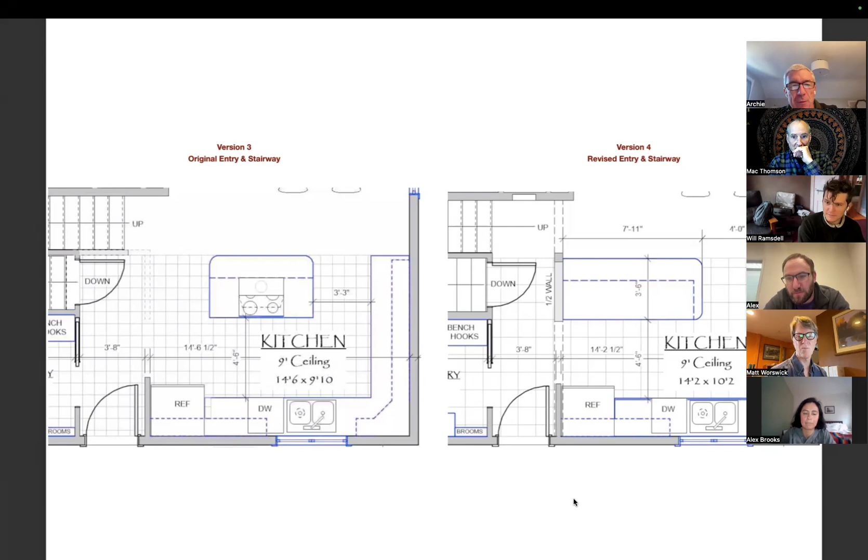Okay, I'm going to talk about the stove for a minute. You're going to see the stove in two possible locations: the island on the left, and what I'll just call the exterior wall, since whether it's north or south will depend on where this house is located, what side of the street.

We've found out a few things since we last talked to you, a lot of it has to do with ventilation. Engineers, and Claire too, have had some pretty good insight into this. It's not just smell, it's heat, so you really want to ventilate to the outside. Our engineers have suggested it would be best to do that against that wall.

It also gives us more efficiency because we have the ability to put a microwave above it. I'll show pictures of this in a minute. It would likely be a little cheaper doing it there because of where you have to run the wires. You're going to have to add a hood from the ceiling, I'll show you a picture of that too.

So you'll see the stove on that side, and it looks like that was going to work better overall. The final thing was for efficiency of the kitchen, this came out of the Juniper, to be honest. It works very well in that location.

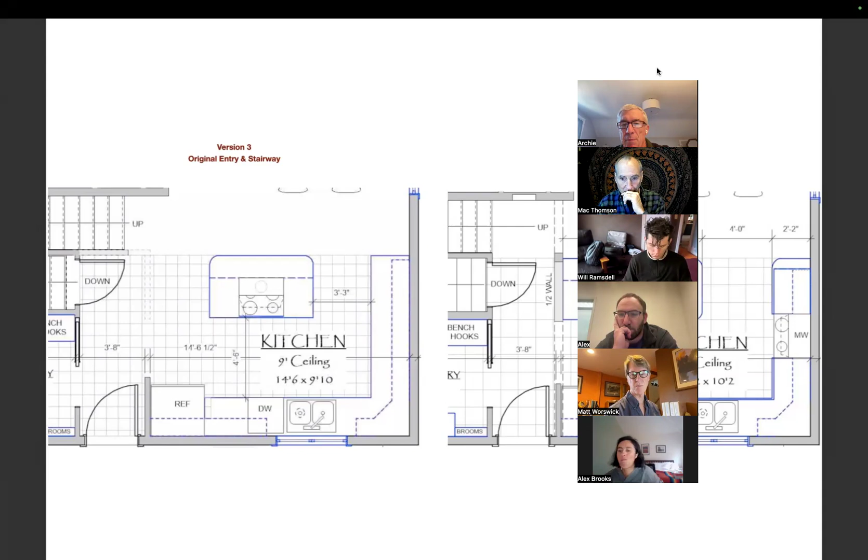I'm going to jump to this because I want you to see the pictures. The island one, we were pretty much forced to do this. That adds cost, and it also affects the view, which I'll show in a minute.

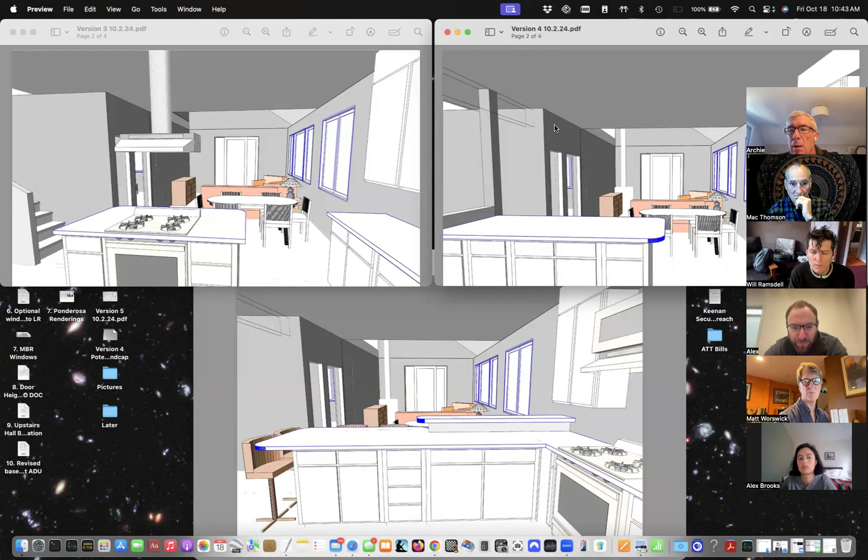And you've got two there. I'm going to go to what Matt has asked, these are all done by Matt, so they're different versions, and we'll talk about island versus U-shaped or whatever as we go along. What I really wanted to show here is the stove at this location, you're going to have to do the hood, and here it's kind of incorporated in. And you saw the pictures, this is not probably how we would do microwaves as far as that goes.

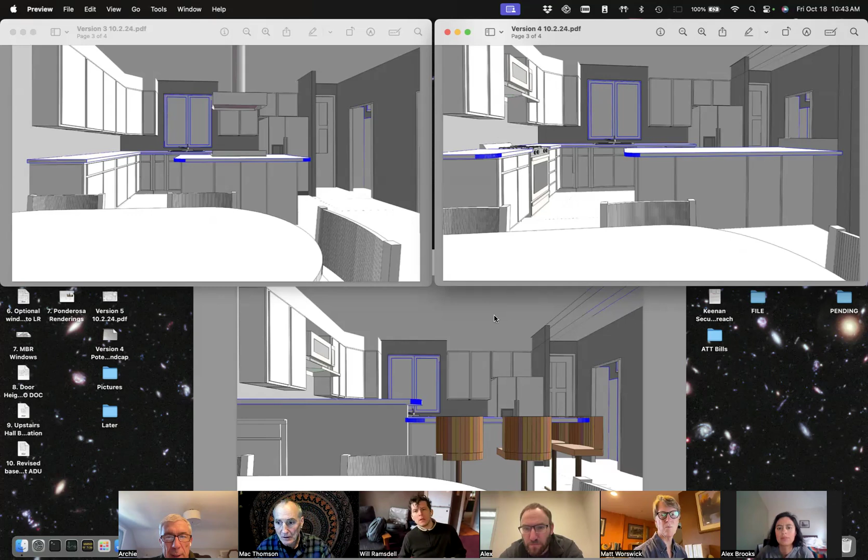I'm going to quickly give a view again, so now you get a view of here, here. One nice thing about this is if the stove or oven is open, it's very easy for people to stand on both sides, extract what they want to extract, and be safe at the same time. It could be moved to the right on this one, which we'll cover in a minute, it's just not quite as much room.

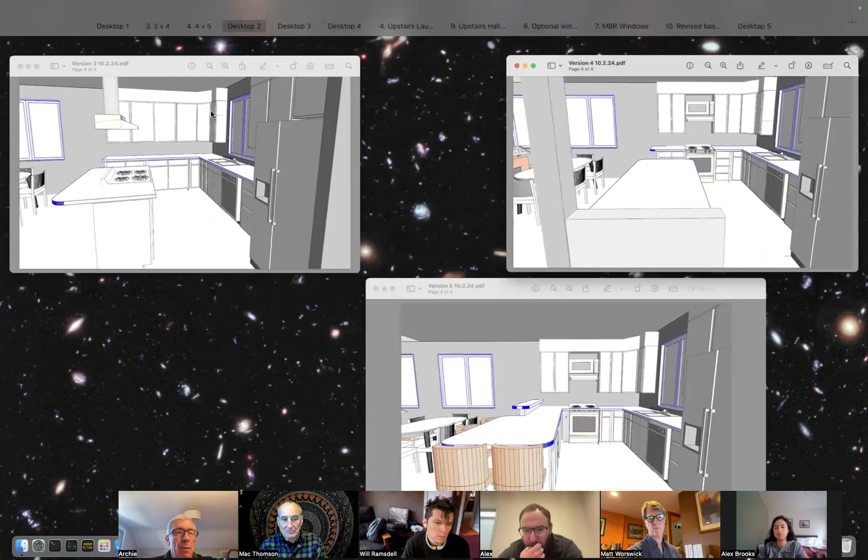So now we're going to go backwards. Does anybody have any questions on the revised entryway? Alex, Archie, Alexia, anything?

Archie: just one comment, the wall on the right, regardless of whether your house is on the east side of the pathway or the west side, that will always be the south wall. Oh, yeah, that's right, because they're mirror images. Yeah, my mistake. East and west changes, but north and south stay the same.

One quick question, which I think I know the answer to: on design four, we're not planning to wall off the ADU, but if you were to wall it off, it looks like you would only have one entryway into the kitchen. Is that correct? That'd only be which version? Version four? Yeah.

Let me jump in, go ahead Matt. So originally, where Archie showed, it would probably be a solid wall, and you would have a single entrance in. That was version 3.

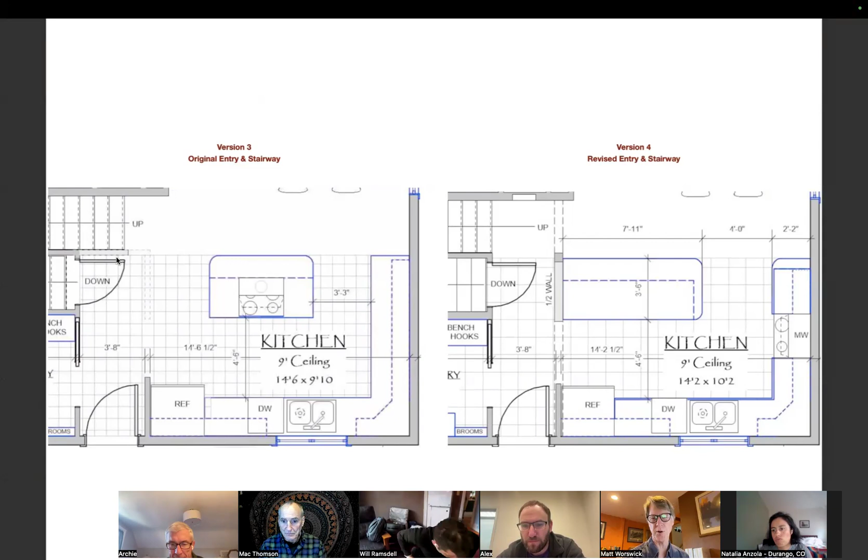In version 4, and we'll get to this in more detail, in terms of the sense of separation or amount of separation you have from the entry and the kitchen, version 4 is showing a half wall there, a column, which may or may not need to be there structurally.

In my mind, you could actually build right behind where the door is open 90 degrees. You could put in potentially a door there as well, across there. You're going to have some potential door conflict things, but if I was going to close that off, I would put in probably an interior French door with a glass panel in it.

You could potentially have screens in the glass so it would allow daylight but provide privacy, and it would swing back against where it's showing the half wall, which would become a solid wall. Then you could have another door, probably a pocket door if needed, between the kitchen and the entryway. The point is it's customizable, much tighter, but you could end up with a kind of enclosed hallway by putting in two doors in effect.

Does that make sense? It does. And again, we're not planning to do that now, but I was just curious because it looks like it does change the entryway. So I was curious what your thinking was.

Right, it is a trade-off, but as you can see, if the kitchen has a lot of extra space, which is very desirable, I wanted to provide for that, but still allow the opportunity to create some privacy if people needed it for the ADU.

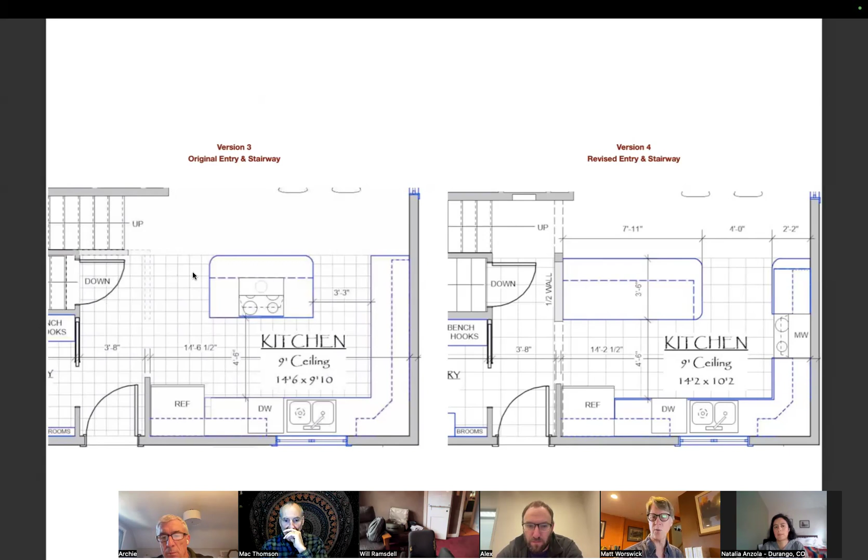You can see through, but in version 3 and some of the other versions, you just kind of walk into the kitchen, and you can also modify the shape of the bar. The half wall can go away, that kind of thing. There are other versions of the half wall that could also be a storage element, like a cabinet, as Claire brought up—there are some great ideas for additional storage.

But the sense of separation from the entry is one piece, and the sense of separation from the dining room into the kitchen is the other one.

We'll show with some of the visuals that Archie ran through—we've got a U-shaped kitchen with a half wall type element—how the sense of separation from the dining room into the kitchen, and the visual connection of what you can see on the counters, varies quite a bit. So I think Archie has some of that queued up and we can review those elements.

So do we want to do that before we get into 4 versus 5? I think we do. To me, that starts emphasizing those two elements. If you do 4 versus 5, we'll be able to cover both of those.

So you can see top right with the half wall or some kind of storage there in the column. Just from the entryway, there's that kind of sense of separation, and over your head you're going to have that with the beam and things too.

The lower center is the U-shaped version, but one of the main distinctions is the way the bar counter is handled, so that it wraps around. So you have bar stools on both the dining room side and the entrance side, addressing some commentary about being able to sit at 90 degrees and have crosstalk and things like that.

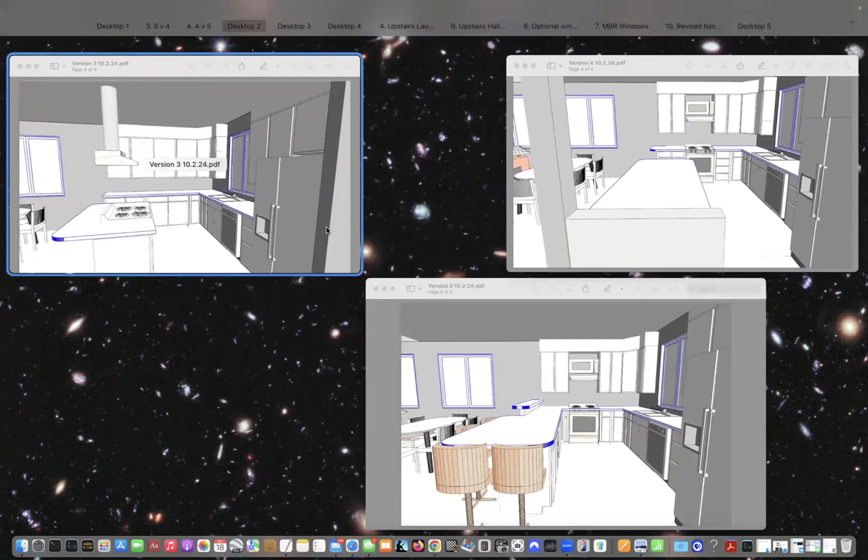So now you're seeing... we haven't got to this yet, so that's a great introduction. Thank you, version 4. This is version 4 versus version 5. What you've got is the redone entryway, and you've got an island versus the U. The U is kind of unique because it offers you the best of both worlds. I'll show you a picture in a minute where you've got a half cap wall, which hides part of the kitchen, yet you've also got the raised bar. So if people want to sit, or however we want to do it, if you want to put cabinets there, you can.

So Matt, do you want me to go to the pictures of it or the drawings? Yeah, I think for people to visualize. So I think in the floor plan here, you can see the basic traffic pattern.

Can I make one point on the floor plan? Those grids, folks, are a foot on the side. So if you want to use it for sizing, you can do it just by counting the feet. They're 1 foot grids.

So you could see there's the basic difference in terms of the double traffic pattern versus the single. In the U shape, the bar's pulled back in a little bit, so the entrance is a little bit larger, and we also have that wraparound seating area. So that's kind of the traffic pattern type elements.

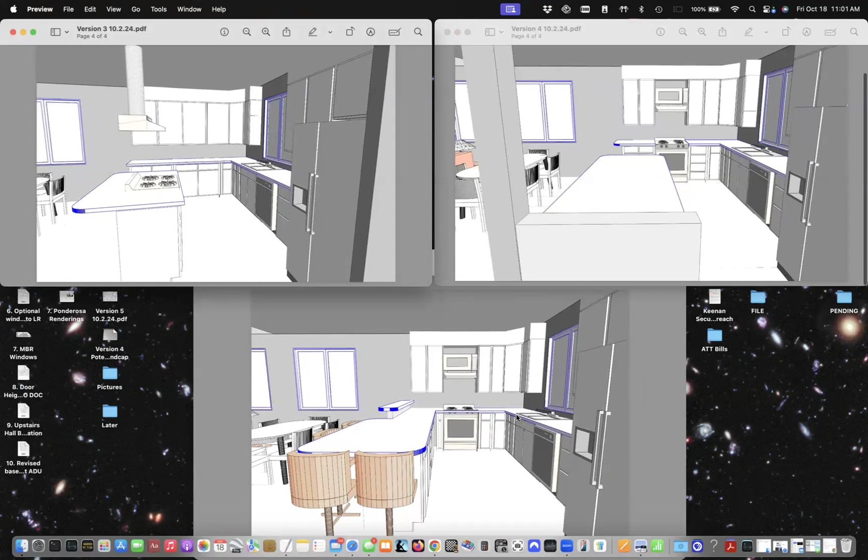I think one of the biggest pieces has to do with the visual connections. We talked about the entryway, and this was the picture we looked at earlier. Archie, do you have a comparison from the dining room?

I'm having enormous trouble, I'm going to have to do it this way, I'm sorry. Okay, so as you might imagine, in terms of sitting in the dining room... that's a good start. So if you're in the dining room, you can look in.

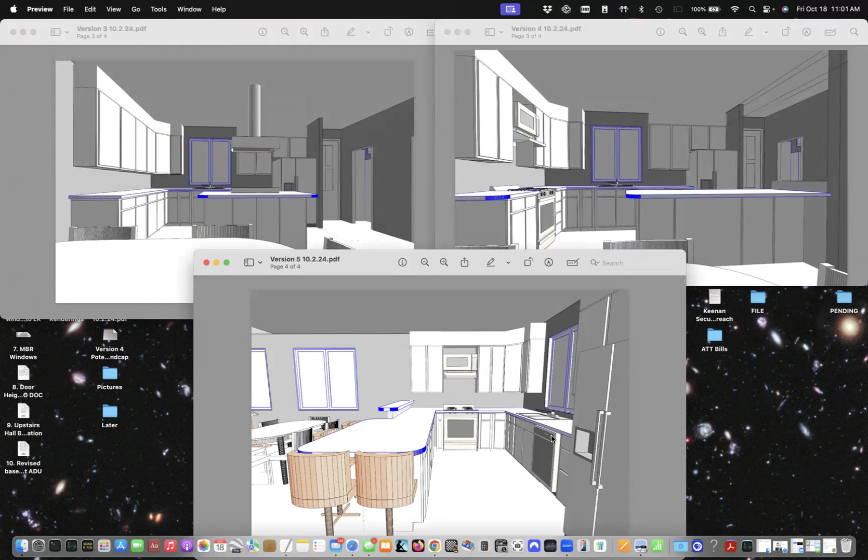In the upper right, I think, is the expanded version. So you can look in, you're looking at your stovetop, you're looking into that space.

You can imagine, and Claire might want to jump in here, but she did a great job with the juniper project basically talking about your lifestyle in terms of how you like to entertain. If you have people over, is it interactive? Are they helping to cook? Is it informal? Are you a fairly clean-type crew in terms of managing dishes and pots and all that kind of stuff, so your counters are relatively clear, or do you not care if people see that? Or do you like a little more separation, a little more formal, maybe you have things made, you want people to sit down.

Like the lower picture, you can see that half wall element really blocks the view of the cooking area all the way around the stove, etc. It also allows more separation if you have small appliances or other stuff sitting out on your countertop. So there's traffic pattern issues, but the view of top left, and well, actually all of these are good.

Top right and middle bottom are kind of the number 4 and number 5 versions in terms of the visual separation. So I'd really love to get some feedback on people's lifestyles, how they like to cook. I invite Claire to jump in if she has additional comments, and then get feedback on that sense of separation and what people's preferences are.

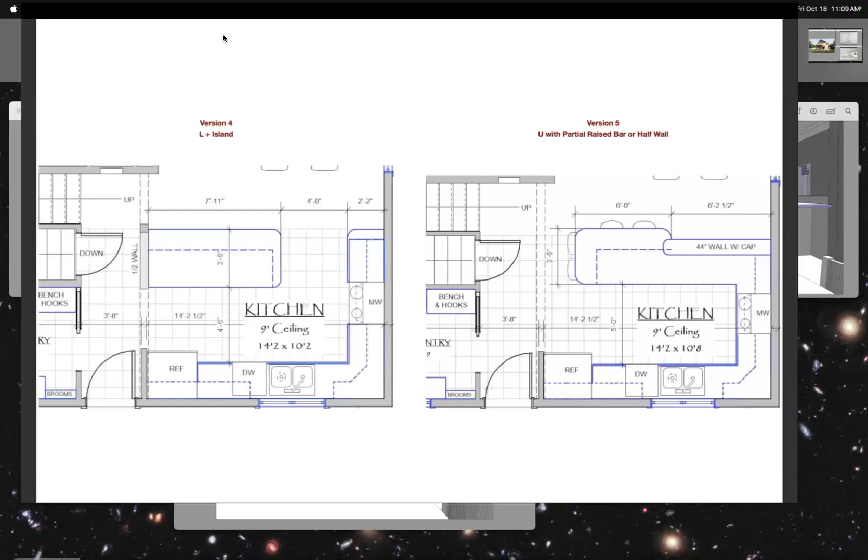I'm actually kind of wanting some sort of hybrid between 3 and 4, though. I like the openness of the view from the door in version 3, but having the stove over on the wall makes sense. So having the island a little bit bigger maybe than in 3, but having that openness in both directions seems nice to me - just to throw a wrench in everything and not agree with a single design.

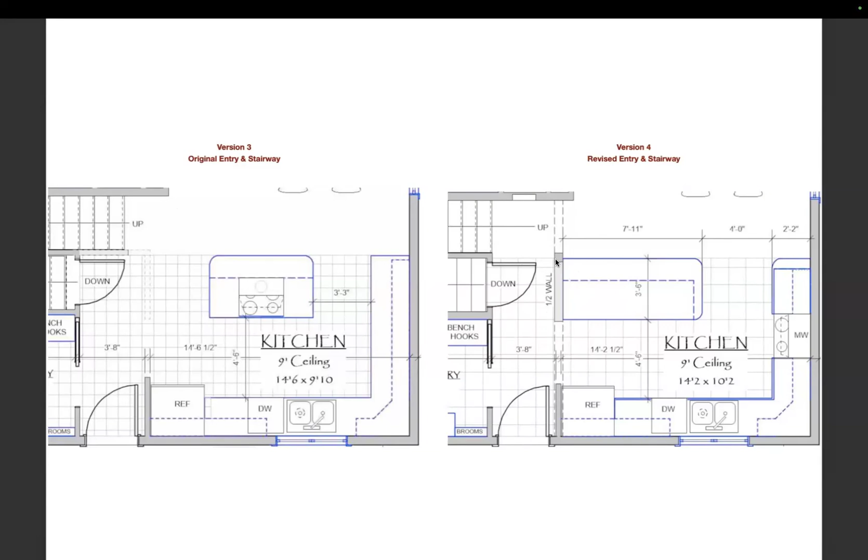Okay, hang on a second, because of what you just said. The one thing I'd point out - Matt, correct me if I'm wrong - but as it sits now, except for the post, it isn't all that different from what you see, because this corner hasn't changed. Right, that corner's absolutely... I mean, the front door area mostly hasn't changed. What changed was the stairs, and the post is in your field of vision. But other than that, you're pretty close. Right, absolutely, yeah, so I think it's mostly the post.

The variables in there are the post and beam and half wall elements, or taller cabinets, that would create a sense of separation at the entry. I think what I'm hearing is if you wanted to open that up more - if the post wasn't there, if the half wall wasn't there, and if they made a cabinet version tucked down under, so you could do a cabinet facing the entry but tucked under the bar - all of those elements tend to open it up more. So when you walk in, you don't have as much sense of separation from the entry into the kitchen.

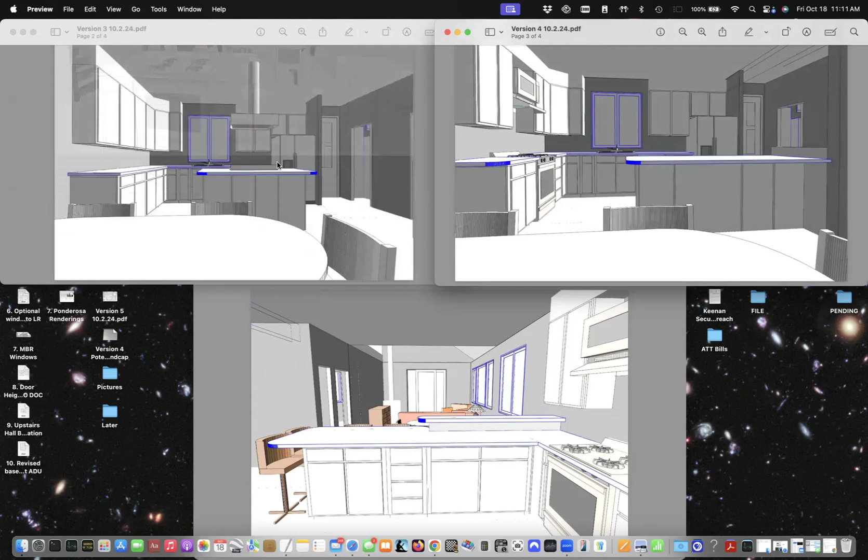That's some of the fine tuning that Archie talked about with the island. When the island doesn't have any appliances in it, it makes it a more flexible element. I think that's one of the nice things, and we'll have to get in with the SRT and our cabinet suppliers to see if people can customize those or whatever. But there's nothing really constraining us from having some adjustments to affect the feel and function of that island element.

That all makes sense to me. I'm gonna throw in something here - not something we need a decision on, but just to let everybody know. Claire comes from another co-housing community, and I hadn't even thought of this, but as long as the floor is continuous, you don't even have to put the island in. What happened there is a bunch of people ended up putting their own in after the fact, and they had what looked like different kitchens when in fact they were the same. We're not proposing that, but you have a huge amount of options that could be done, and we can talk through later. We don't have to make that decision now - it just didn't dawn on me. You may not even have it at all if that's the way you want, and plan to do something at a later date.

Who was up next? I think Rejoice - Rejoice, I don't think we've heard from. Yeah, I like version 4. I do like the idea of maybe not an elevated half wall, but some open bookshelves for cookbooks at the end of that island, at the end of the counter.

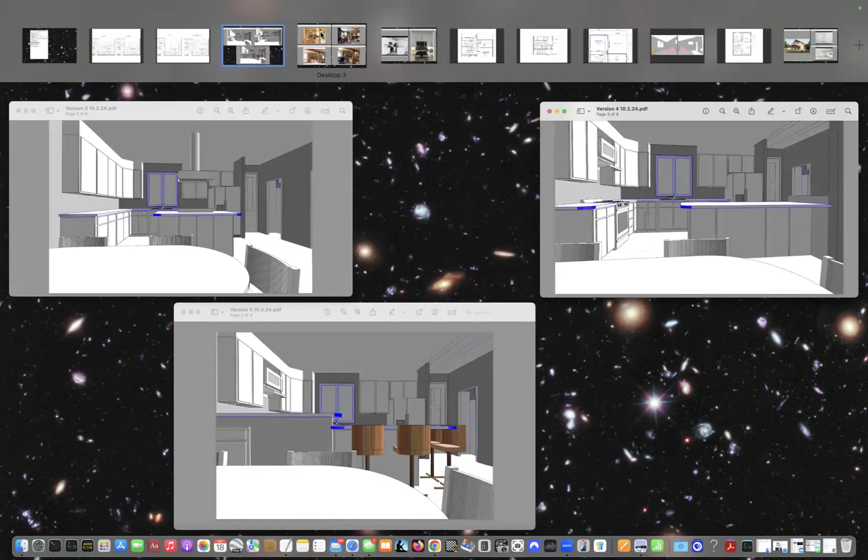Like right on number 4 here, they actually have some ductwork in there, but that could be open - that could be an open bookshelf. I'm talking about the end of the countertop going into the dining room, where Claire was pointing, upper left there. Yeah, that would be a perfect place for that as well.

Good. And then it looks like Eris maybe headed out. So I think that's everybody - did I miss anybody?

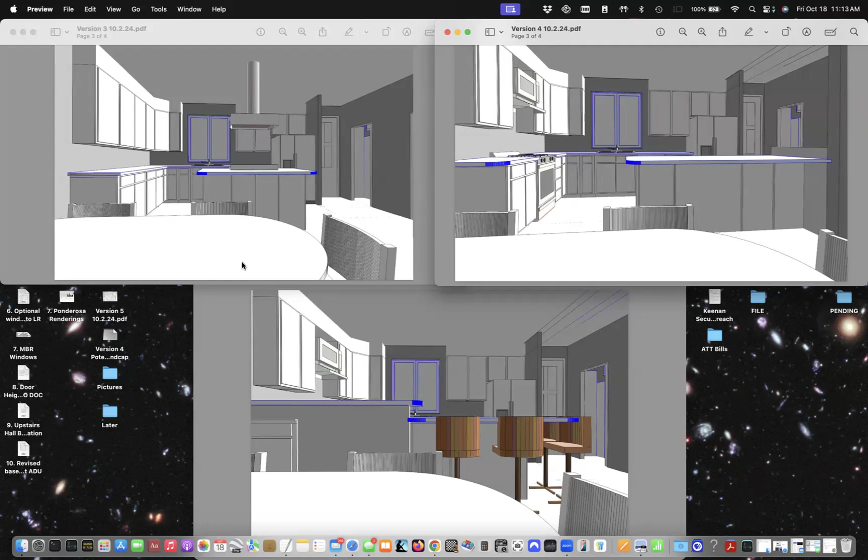Okay, all right, I think that's feedback from everybody. Mike and Matt, I think we have the feedback we need on this. Do you feel like we need more?

I think for now, clearly the island is the winner. I think we've got some variable feedback in terms of the sense of separation at the entry and the details of the island and some of the possible cabinetry storage type elements. Like you said, I think that can be fine tuned.

I guess as far as proceeding with the structural engineering, I will look into not having to have that post in that location so that we can leave that part open, and then we'll see what other elements bear on that in terms of its sizing and things. But I think that gives us our basic shape and some flexibility to move forward.

And it seems like pretty darn close to a consensus, which is the way co-housers like it. So that's great feedback, I appreciate it. Could not get a better summary.

I would suggest that, because we've got other stuff we need to cover, we do a final run through with everybody on any last comments on the kitchen. If you have no comments, that's fine, but I want to make sure if there's anything we've skipped over, that we cover it. If there's no objections, I'm going to start with Joan, and I'll do my best to remember.

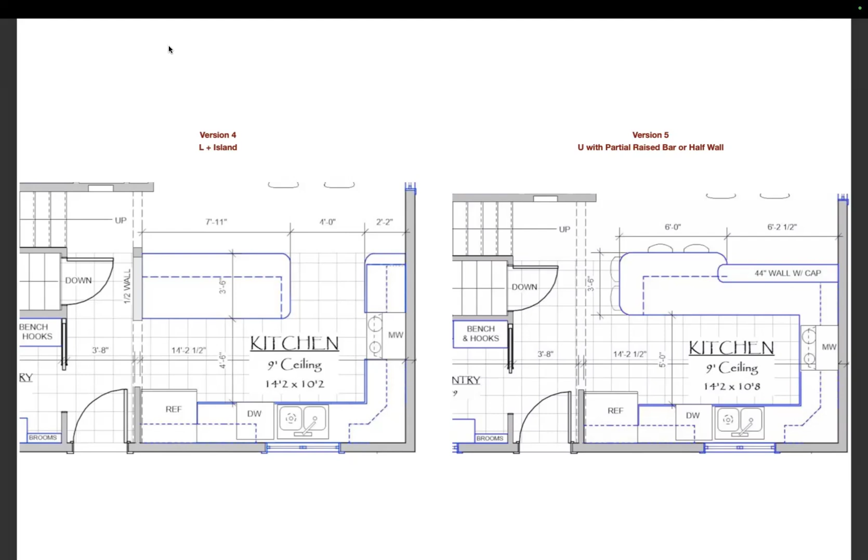Yeah, I'll make a quick one on that. It was invaluable to me to get to hear Claire. I know the SRT is going to be looking into getting an expert on lighting too, because there's a lot to it. So we'll have more conversations about that as we go, but the experts make a difference. They really, I think they can keep us from making mistakes. Okay, so all right, great.

I get to see everybody. Yay. Claire, do you have any final comments on this? No, I just thank you very much. You look like a true co-housing group. Yeah, I've never seen, in 11 years of living in co-housing, I've never seen a decision taken quite that quickly, and you guys are amazing.

So just go for it, and I'll see you again at some point. And I'm gone now. Okay. Claire, thank you. I look forward to meeting you in person. Okay, bye-bye. Bye.

Okay, let's move on to number 4. Now we're going to ask for feedback for the next 5 items. If you don't have any, you can say I'm fine with it. All of these have visual pictures, so it gets even easier, except for item number 5. Then we have 2 items that we're just going to present that come from a prior request, and we think you should see them and like them.

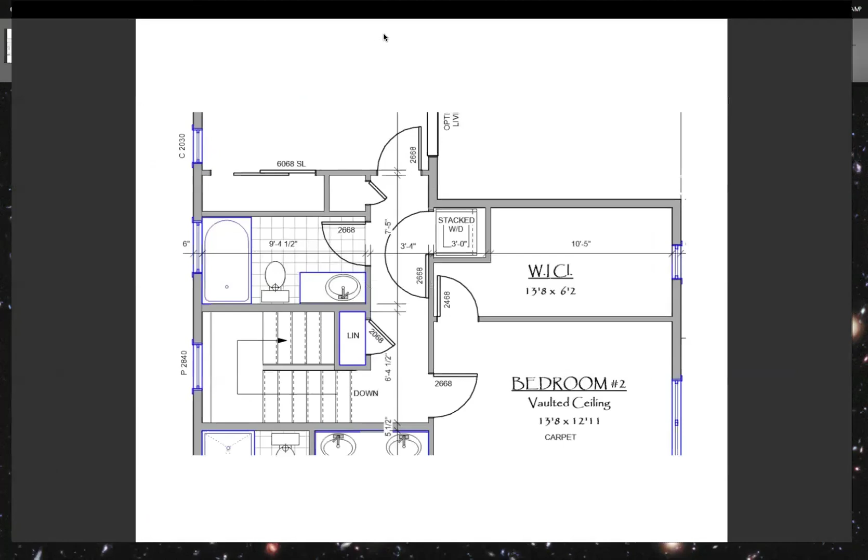So let me go to the laundry, second floor. Okay. All right, so Natalia, I think this will be interesting for you.

It occurred to us after the last meeting because you had said you would like a top floor washer and dryer, and we thought it would go across here into the walk-in closet. But you said that might be too noisy, and you weren't sure you were thrilled about that.

It dawned on us that you could do it right here. Potentially there's a mechanical issue, which we're not going to deal with now, that could change this, but for the time being it doesn't. You could create a space out of the walk-in closet without changing anything else about it; the door would stay where it is. You would have room for a stacked washer dryer upstairs.

Matt came up with the idea that since this closet was quite long with double doors, creating an area you had to come in and go to, if he moved the door to the bedroom up to this location, he could create another linen closet here. What that does for you, and I'm sorry I don't have a picture of this, is let you eliminate the existing linen closet and open up the stairs completely.

I believe phase one stairs are open. Is that correct, Mac? Well, in the Model D, they are, at my house. Okay, we might want to get some pictures of that, but that really appealed to us, no other reason, because you get a nice bright window here.

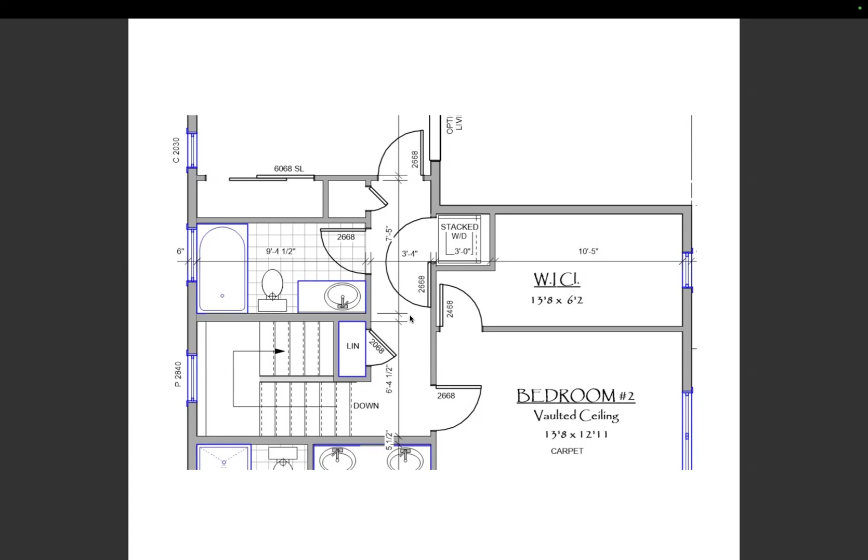They are very efficient. And I did forget the most important person to me, Joan. What is your feedback? Yeah, I like everything I see here, and I really actually like the open stairway because I think you're going to bring a lot of really nice natural light across the stairway to the landing upstairs through that window. I've seen the P1 homes that are just this long hallway without any natural light, and they're quite dark. So I like that.

All right, Archie, quick question for you. You mentioned a small washer dryer. Is it that cabinet, that space, that would have space for a full size washer and dryer? Is that correct? Yeah, I think it would have the way Matt did that. Matt will weigh in here. That was a standard size stacked washer and dryer.

Okay, I believe that's correct, thank you. And I believe we did some research. There's even room for one down on the first floor, but it would be small. Okay, and we're not going to address that today because it's really just a hookup issue. But yes, so we know that is standard. Good question, thank you. I think we got that.

Can we move on to the next one? Did everybody get a chance to speak? I lost track. I think we did. Okay, yeah, we did.

Okay, let's see if I can get this. That's the upstairs hall bathroom.

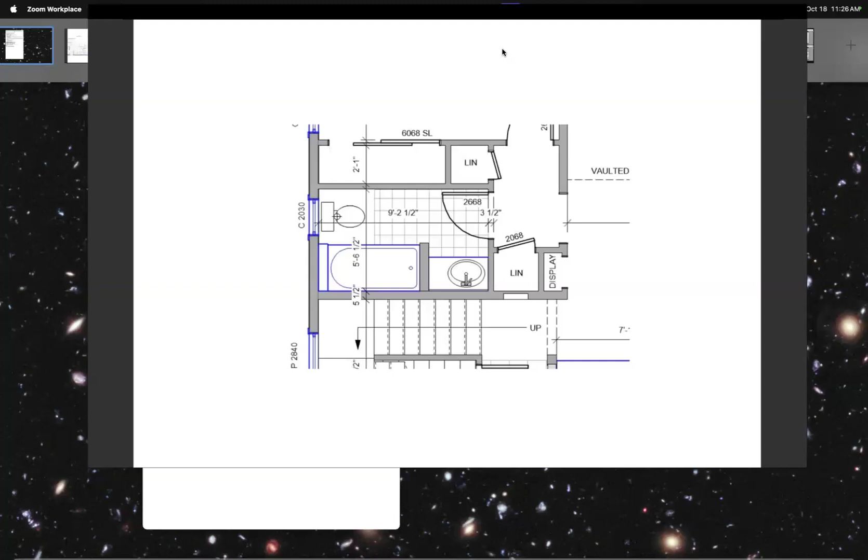Okay, so there are two things going on here, and we're going to handle them sequentially. Right now, all we're doing—this is the first floor, you might remember the display—the linen closet that we did upstairs, the additional one, we also did down here. This is technically big enough, I believe, for a small stacked washer and dryer, which could become important later if you ever had to stay on the first floor. But it's not going to be for standard size. That much I'm sure of.

And the only point was, before this was an open space that you had built-in drawer space. I'm going to take a chance here and go into the second item, and we'll comment on both at the same time. The other thing you're seeing here is we wanted to add a window to this bathroom. In order to do that, we needed to change the orientation of the shower, because if it turns out to be an insert, you really can't cut into those to put windows. We may do other options, but we didn't want to constrain the SRT. The P1 houses are designed in this fashion: you walk in, you have your toilet, then to the side you have your shower and your sink. And Matt's enabled us to have a little bit of counter space too for the sink.

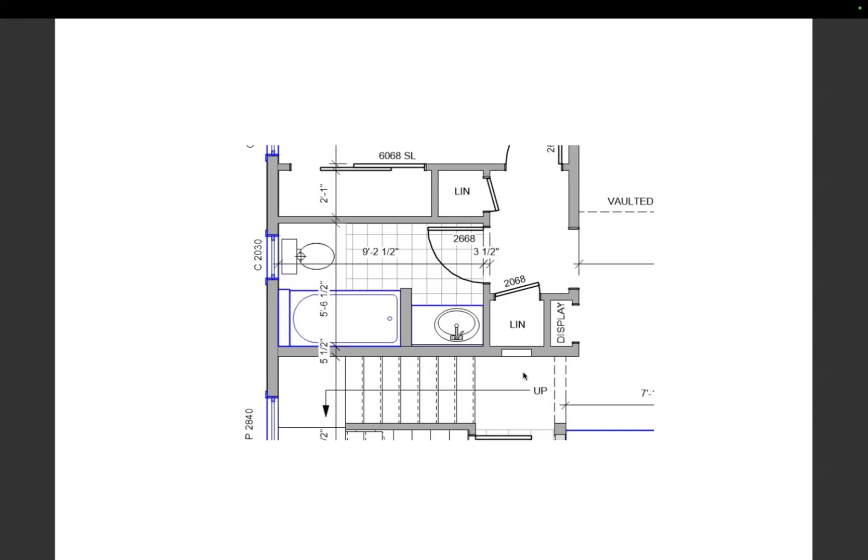All right, let's move on. Folks, this is the best meeting we've had, period.

So, this is one that Matt definitely needs feedback on because it's very structural - upstairs hallway, upstairs laundry option. There is the possibility to put a large - so this is the top floor, bedroom office three, the walk-in closet's over here, and you're looking down into the den living room, the vaulted ceiling - and there is a possibility to put a good size window or opening looking down from the office into the vaulted ceiling below.

The reason it's critical is that if we think we want that, even if we plan on doing it later, we have to build the header and frame the wall appropriately. Matt had some really interesting comments on ventilation with this that I'd never thought of. Matt, can you express your experience with that?

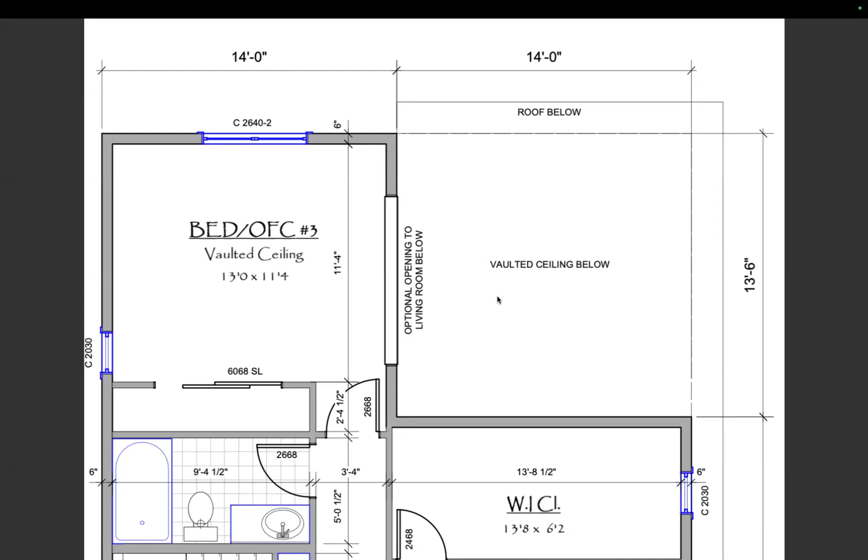Well, one of the issues with a multi-story house is warm air rises and you get stratification. So this is a very tall vaulted ceiling - if you leave it closed off to the upper level, you'll just have a warm pocket of air. The mechanical guys may try to pull that down with a return, but one of the things I've experienced in designing solar homes is creating a convection loop in the house between the main level and the upper level.

So the way that would work, if you had an opening here - and we could talk about different types, it could be a window, shutters, or wide open, depending on your privacy and control issues - the warm air would rise in the living room. That's where it's naturally going to go, and you've got good solar gain coming from the whole south side along your living dining area.

When it rises, it goes up to that upper level. If you leave the door open between that upper bedroom and the stairs, the warm air rising is displacing the air from the upstairs, and it wants to come back down, be replaced down the stairwell.

So you literally end up with this circular motion of warm air rising, going to the upper level, the cooler air dropping back down the staircase into the main level. And it does this round and around convection loop, which is a really wonderful non-mechanical way to distribute temperatures in a space. So that's kind of the physics of how the airflow can work a bit better.

Mechanically, oftentimes, and even our mechanical engineers are talking about potentially having separate heating systems for the upper level than they do for the main, in order to try to offset what typically happens, which is you get stratification stuck on those levels.

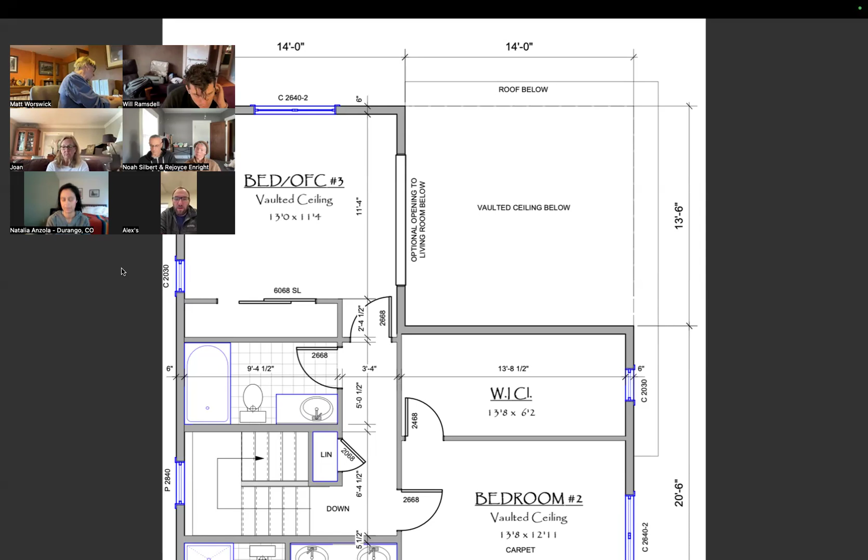Matt, what I hear is we need to design the header and probably want to get it priced. We don't necessarily have to go into the window now, as long as we have the header. Wouldn't that then become an SRT thing, pricing it out? Yeah, I think structurally figuring out the opening in the header is the base case. Then SRT could look into what it costs if it's blocked in, what it costs if it's completely open, and what it costs if we put a window in. Those would probably be the choices.

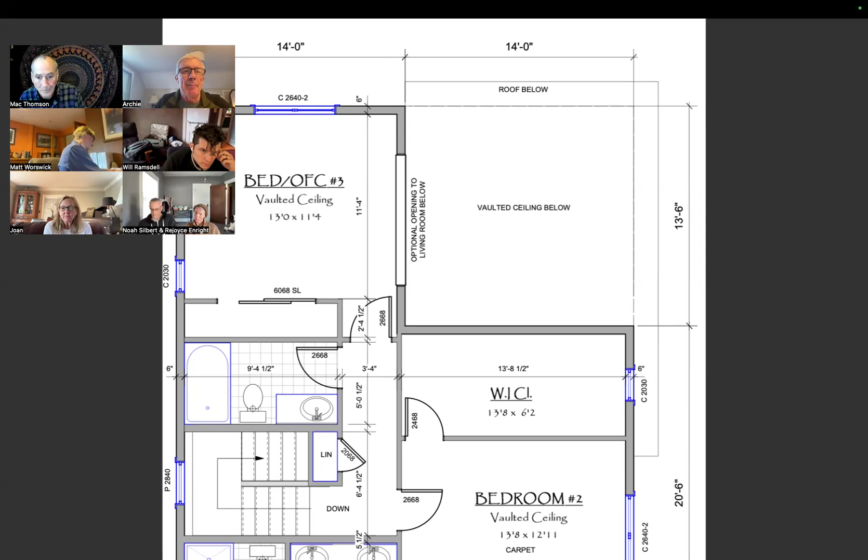Mac, any comment to that? Nope. Okay, we're going to move on. Thank you, that was interesting.

The comment was made that it would be really nice to have that moved to the center of the room. You might be able to gaze out of it from looking in bed, or not. I'm going to ask Matt to go ahead and give us some of the reasons why it was done this way, pros and cons. Yeah, thanks.

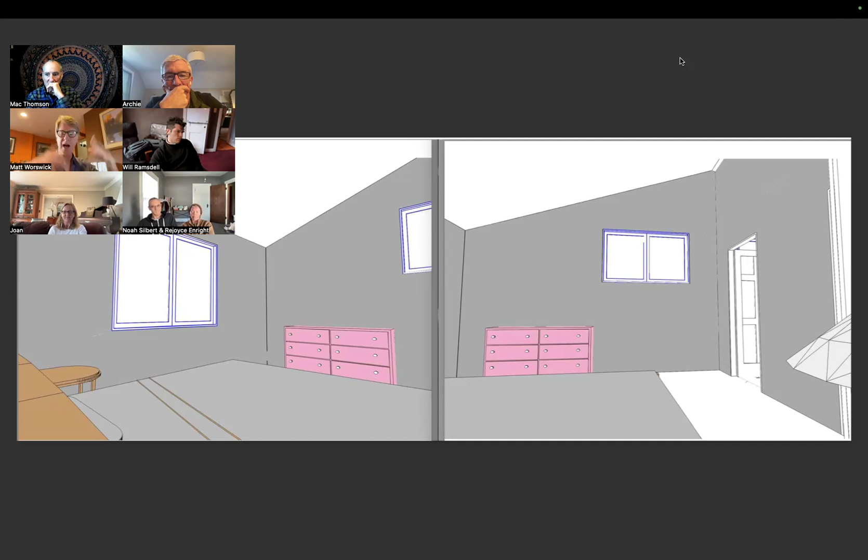One of the reasons I put them at that height is this is the front of your house, looking out across the walkway at other houses. So in terms of privacy issues, walking around between your bedroom and bathroom, depending on what clothes you're wearing or not wearing, having a window up high so you can look out and see the sky, but not necessarily looking out across the walkway at your neighbor's house looking back - there's a privacy factor there.

So various issues in terms of wall space, fitting it in the overall volume with the vaulted configuration, privacy issues, things like that were the reason I put it in that spot.

Mac, I know phase one has it more centered, I believe. Well, all the models are different in phase one. In our house, the window is more centered and it is lower too - the bottom of the window is not at 5 feet.

Can you speak to the advantages of that? Well, laying in bed, we get great views of the hillside and the rising sun coming up over the hill. So I really like that.

Now we're lucky that we've got two houses that are kind of offset. We don't have a house directly across from us - one's to the right, one's to the left. The one on the right is a one-story house, so we're looking right over it, no privacy issues there. The one on the left is far enough that there's not a privacy issue, but the potential does exist if there's a house more directly across that's two-story, of privacy issues.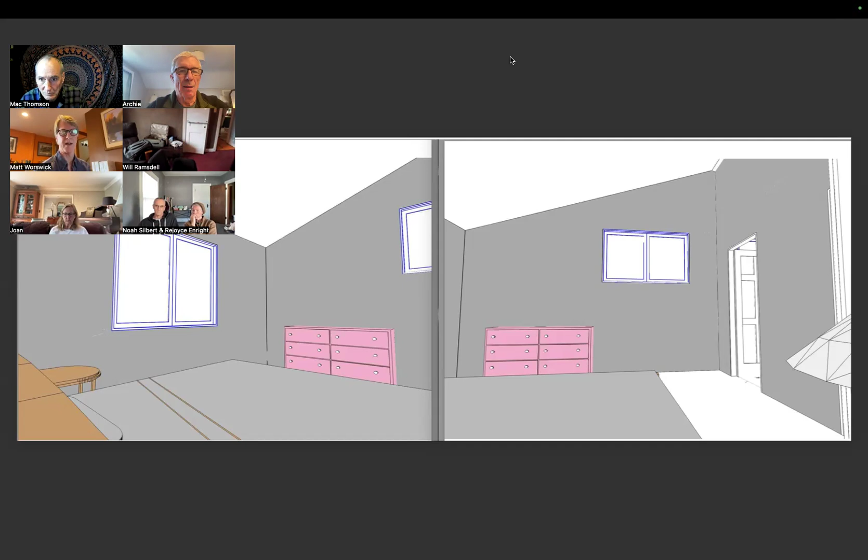You got to have the wall framed. I think they'll frame that rake wall and have a header above it. So yeah, I would guess that if it moves over, it would also come down somewhat. There's some constraints on the top structurally, and some constraints on the bottom in terms of the porch roof. So I'd have to look at the exact arrangement there.

Mac, are you able to bring that up? I can. Just to frame the issue, we're basically talking about whether the window should stay as it was pictured in those two photos we just looked at, or should it move to the left a little bit and possibly down if that's needed.

Okay, so let me find the front view right there. Share my screen. Oh, I got to go back to that one. Boom, boom.

All right, so that should be showing for everybody now. So it's this window that we're talking about, potentially sliding it left, and down slightly, depending on the structural requirements.

All right, I'm going to take over the share again, and let's just go through everybody. Really, we just want to know your opinions. What do you think, either way?

Okay, let's see, optional window. Whoops, sorry, not the wrong one. Okay, wrong one again. Where did it go? Upstairs, upstairs. I lost it, so we're just going to stay where we are.

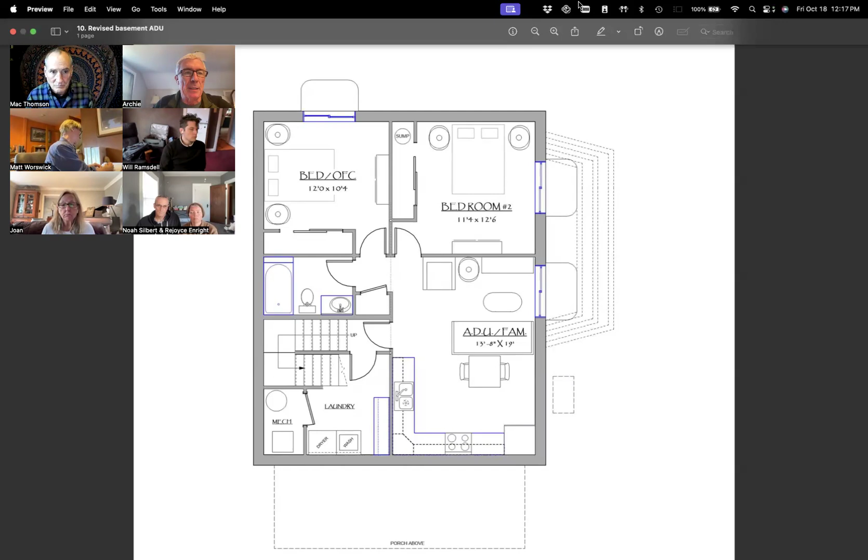All right, well, I'm going to attempt to bring up the old one and put them side by side. And Alex and Natalia, if you would go ahead with your thoughts on this.

Yeah, I like it. I like the double mega window wells, they're a really cool idea. I'm curious, what are the circular things in the corners of the bedrooms? What is that supposed to represent? The donut looking? Those are little end tables with a lamp on it. Oh, got it. Good question.

Yeah, Alex, do you have anything? Yeah, I think I'm generally like it too. I'm trying to think about the positioning of the window and how that might affect the feeling of light in that big room. But I think I understand the reasons for it, so I don't think there's any issue. And I don't really have a strong preference about which side of the room the kitchen's on, so I think it looks good to me.

Will: Yeah, this seems like a win-win-win all around. I like everything about it.

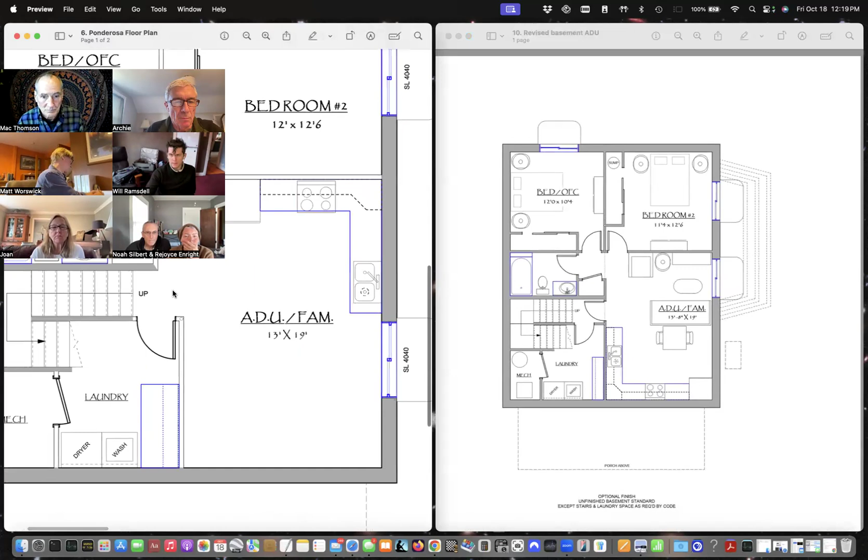Right, Rejoyce and Noah? Yeah, I think we like it a lot. It all looks really good.

Uh, Joan. Overall, I think it's fine. I do have a question for Matt. Yeah, it looks like you maybe shrunk the space of the utility laundry mechanical room a little bit, because you've got walls running straight down the center of the basement, whereas before you had them staggered somewhat.

Correct? No, so yeah, it's good to notice that the mechanical room wall stayed in the same place. The wall between the bedrooms moved a little bit to the right-hand side. So if you look at the dimensions on the split screen, the left-hand bedroom used to be 11 foot 4 inches wide. Now it's, I'm sorry, 12 feet. Used to be 11.4, now it's 12 feet.

So it's moved 8 inches to the right, and that's because I'm trying to line up - there's a central beam element that runs right through there. So I'm trying to line up with it. The beam is going to likely once again potentially be dropped. If it's dropped down in, then if you build a wall underneath it, you never see it. So basically it was a matter of lining up with the structural, which made the left bedroom slightly larger, the right bedroom slightly narrower.

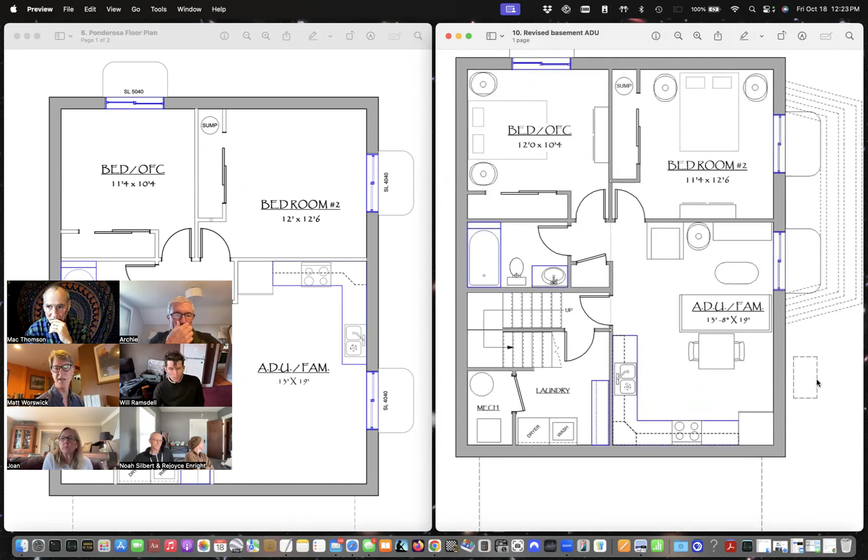Matt, we have to have the exterior compressor on the south side. That was the strong recommendation of the mechanical engineers. One of the issues with heat pumps is the colder climates are a bigger challenge for them, and putting those on the north side here in Colorado, you're not going to see the sunshine. It's going to make it much more difficult for them to run. Then they also have to go through a defrost cycle where they melt down the water and then the water can freeze. They basically said, let's put it on the south if at all possible.

Now, you saw the preliminary mechanical layouts, and they literally showed two locations - one on the south side of the porch and one on the north side of the porch. The reason they put it by the porch on the north side is so that you could get some light through the porch or from the front of the building, but then it's right next to the porch. Both of them were, and my preference is not having them next to the porch.

We have that solid wall on the south side of the kitchen - that would be a good place to put it. One of the other things they said is that it would be wise to build a small roof element, so snow coming down on it, either off the roofs or just falling, for protection. It's kind of like passive solar - you want to get the winter sun in there, but you want to protect it from summer sun and from winter snow and ice.

So there's a decent chance we're going to have a little eyebrow roof sticking out on that south wall to protect that mechanical and maybe screen a little bit from the sides too, so that it's not a big aesthetic issue. It is an improvement.

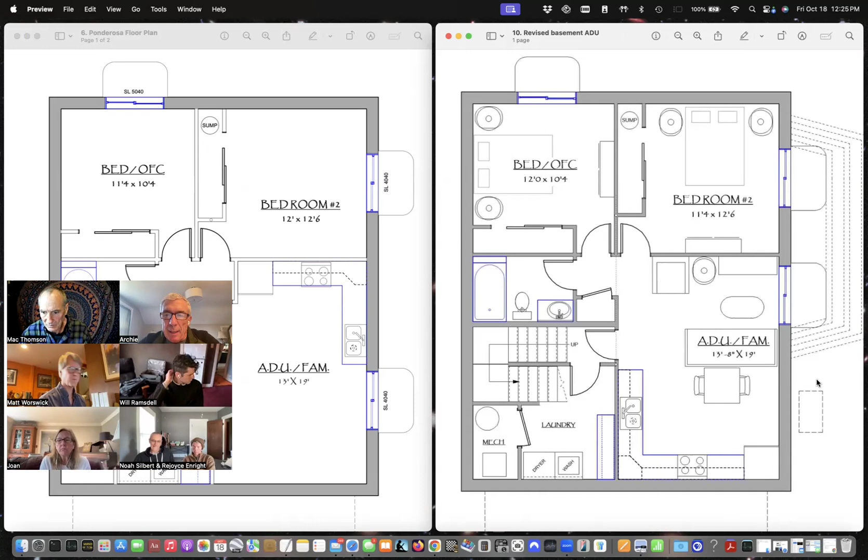And then the other thing is, I'll be honest, the windows like that - I have concerns about that. Is it impossible to separate them? There are also some cool things about the windows, but doing it that way, is it possible, if it was the consensus, to separate them again?

I think it is possible. When I originally went to put them together, you could do it, but they ended up so close to each other they were almost overlapping. And then I thought, well wait a minute - to me it's a nicer feature to have them open and you're getting rid of the middle section, so you're actually using less material. It might overall be a lower cost - one hole with three sides versus two holes with six sides.

I can imagine some pretty cool options with that too. Just curious, and I do want to say big kudos - thanks. If there's any way you can get rid of that beam, that's the first I've heard that. That would be very neat for that basement. We're not going to finish our basement like that, and I have a real question of how many will, but that'll come out in the wash.

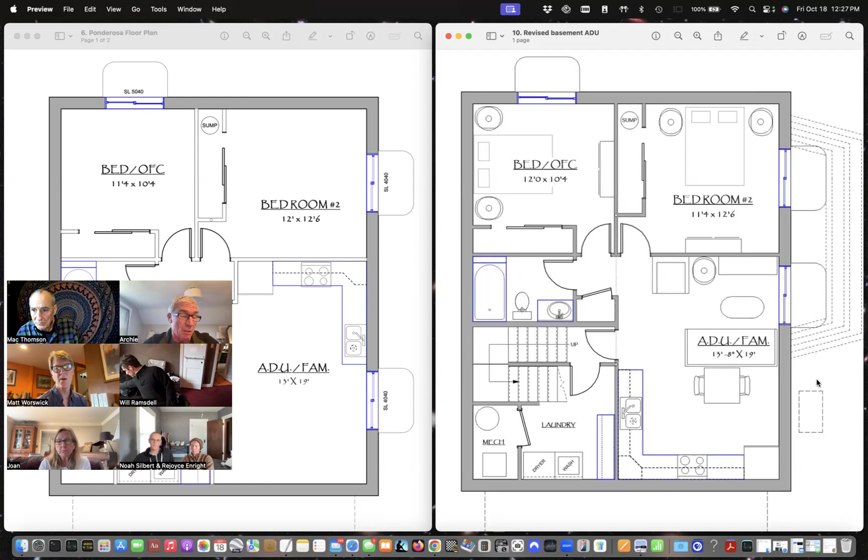That's only my comments right now. I don't see it as... I could see some neat things you've done here. I think I was the last, unless you have anything else, Matt. I was going to move on to the ducted versus ductless. Yeah, when we're done. That'd be a good one because that does pertain a little bit to the beam issues. Yeah, it does. Okay.

So Matt, I have some pictures - you'll give us the description of this. I do have some pictures of... sorry.

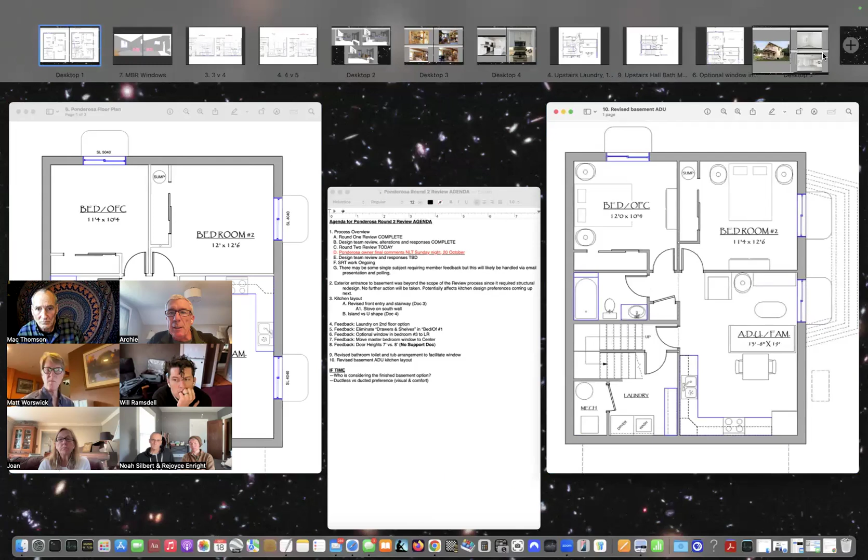I'd like to get a feel for how many people have seen the ductless, often called mini splits, as far as the delivery. With an all-electric heating system, we're looking at a heat pump, and it can deliver to rooms either ducted, which you're familiar with if you've had forced air, with a centralized air handler that creates warm air blown through ducts up through floor registers typically. That's relatively standard.

The other option is ductless, where they're just running tubing, no ducts, and they deliver it to each room with either the ceiling type configuration you see in the left-hand picture, or a wall-based cassette as they call it, which you see in the upper right-hand picture.

Those, of course, are providing heating and cooling. One of the main benefits of ductless with wall mounted units is you put one in virtually every room, and you have thermostatic control for each space, giving you a lot more control. The ducted system is more per level, so you have a thermostat on the main level and on the upper level, so there's less control.

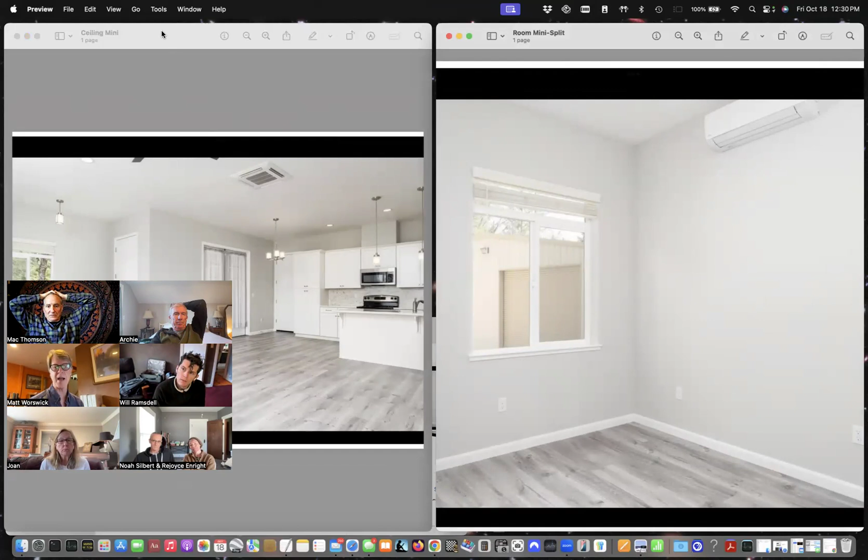In terms of airflow, the way they blow down, and potential noise issues, there's a condensate drain and pump that needs to run sometimes when creating condensation. The little pumps have to run to get rid of moisture. Interesting feedback I've heard: our mechanical engineer had one in his office, and the two guys who shared the office vied to not sit underneath the ductless unit because it was blowing down on them.

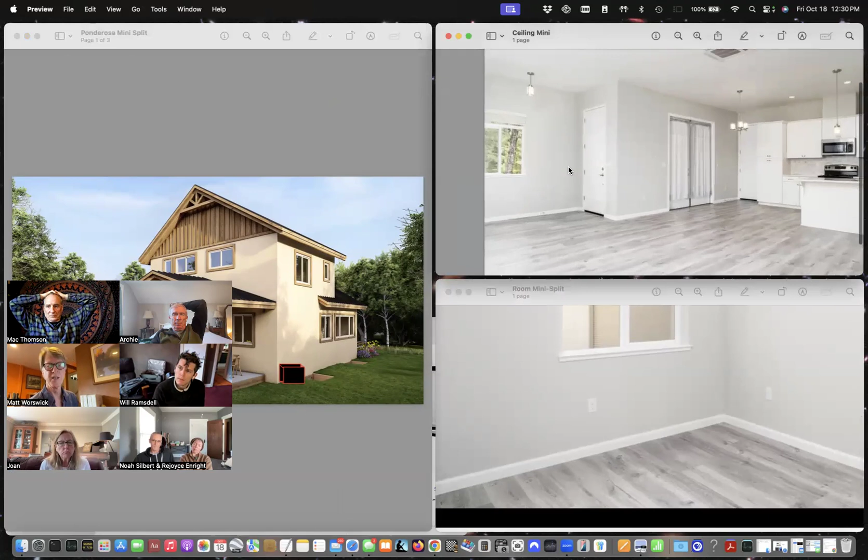The engineers say you can end up with clicking noises and things some homeowners find annoying. I'll admit I don't have experience with these, I don't live with them, I haven't put them in houses before. Some of you may have, but we'd love feedback on your preferences so we know which way to go with the mechanical engineers. Other people may have more knowledge than I do and can chip in.

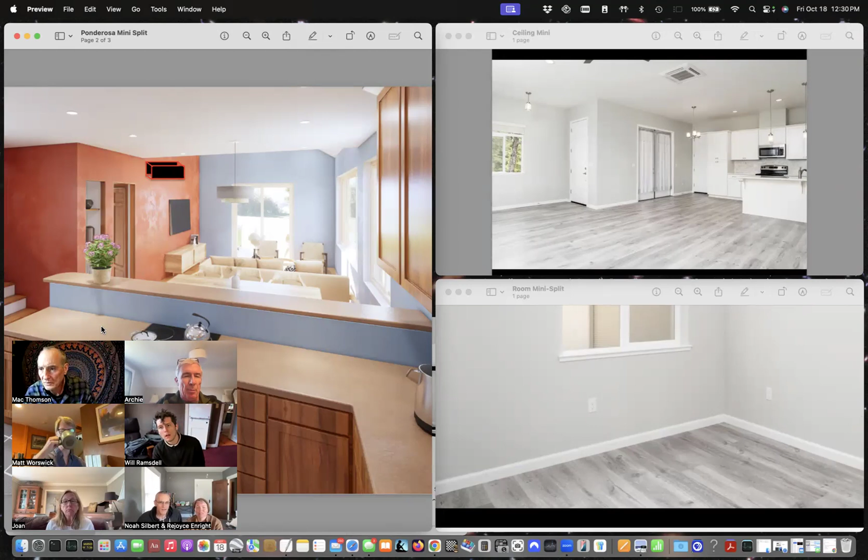I'm going to give a little bit more. Almost everyone here, I suspect, is familiar with forced air. You've had registers in your house, either high or low, and air is pushed through the room. I don't know if anyone's had experience with mini splits or ductless.

This is the picture. Most rooms would have one of these. I'm sorry I can't get it over there more, but that's the best I could do. I'll give you one example: you would have a very early design with four registers for a ducted system in your living, dining, kitchen. At the moment, and they may change this, you'd have one of these in the same area, ostensibly put right here in the very early design. That could change, but you've got to have it somewhere in there.

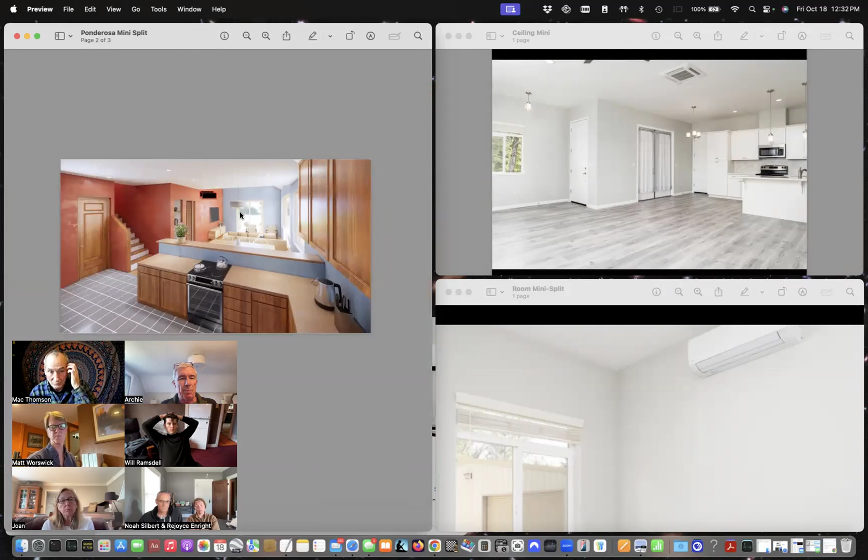This is super crude, I apologize for that, but it's the best I could do. So you would have that same unit somewhere in here - sorry, I'm not a great artist. Whereas with ducted, you'd have them on the floor, underneath the couch, wherever the case may be, which you're probably used to. Hopefully that gives some idea.

Since we're running close to time, I'm going to go around to everyone. If you have questions, please ask those, and then give us your opinion of ducted versus ductless. The ductless would probably be a little cheaper for us, and you'd be able to individually control rooms, I believe. That's all I can think of.

So Will, why don't you start off? Do you have any questions? Yeah, Archie, go ahead.

Could we just start with general clarifying questions? I think this is a pretty complex topic. Okay, good, fair enough. That's a good idea. If there's any clarifying questions, let's get those before we get opinions. Okay Will, what are your questions?

Yeah, I guess I just want to have the clearest understanding I can of the trade-offs. It sounds like we understand about individual room control, we understand about the noise. I've had one of these units in my dad's little farmhouse, and that drain line has gotten clogged several times with bugs and detritus, then it backs up and started dripping into his living room. The guy came in and just put compressed air through that drip line and said you're good now, and I was like, until it clogs again, you didn't solve the problem. So I have that experience in my background. But I'm curious if we could just see this side by side of what the trade-offs are, if anyone has any comments on that.

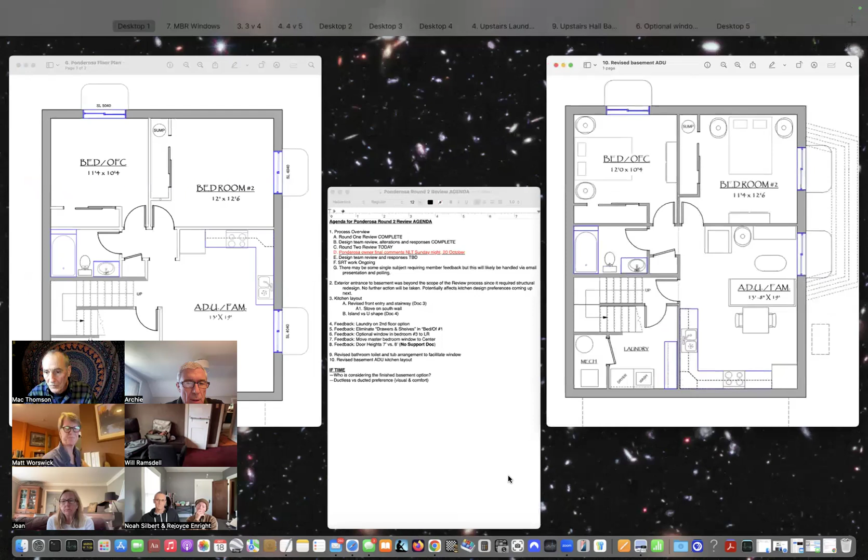That is it, though. I don't think we need to do any more with duct or ductless at this time. Do we want feedback? Yeah, we pretty much just got questions, not feedback so far. I didn't know if you wanted to go that far, but we can do that certainly.

So let's do one last round of feedback and then we'll do a quick review of the meeting and we're done. Joan, why don't you start off with the feedback?

I would think one thing that'd be important to feedback is not necessarily if you think ducted or ductless, but maybe if there's certain decision criteria that are important to you. Like I want a lot of variability in control, or I don't like those big things on the wall, that part of it is ugly. Or if there's certain elements important to you, not necessarily just binary ductless or ducted, but what elements are important to consider as we make this.

For me, they're fairly equal though, the ability to control, but also the aesthetics. I personally don't like the look of the ductless units in every room with a big box up on the wall, I think it's uglier. But obviously I've got control questions as well and net zero questions. So I don't know if that helped you any at all.

Noah and Rejoyce. I think I'd kind of echo what Joan was just saying, I don't particularly like those units on the walls. That other version where it's embedded, I'm more open to. The control, like room by room control, doesn't seem super important to me, especially if there's level control with a ducted version. And then the other issue is cost - if one of them ends up being substantially less expensive than the other, that would be an important factor for us.